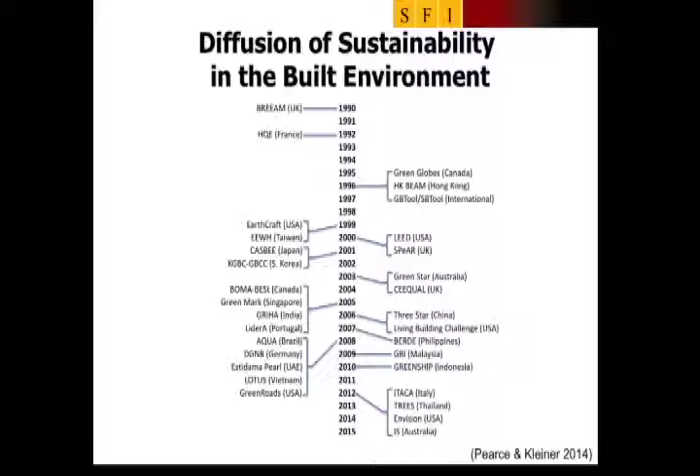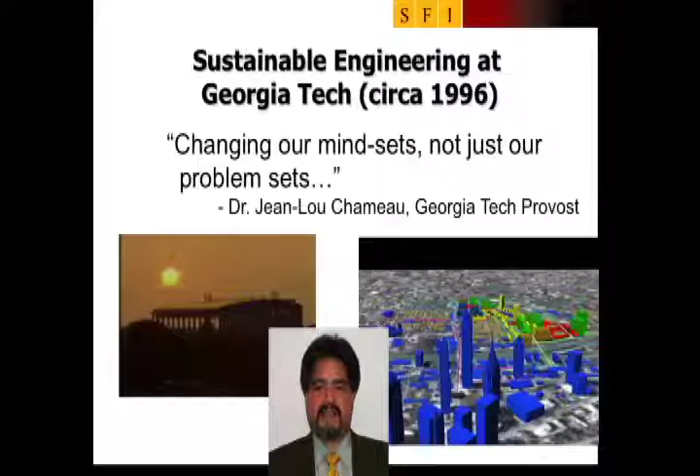And the provost at the time really captured it well, I think, when he said that sustainability is about changing our mindsets, not just our problem sets. It really requires approaching problems in a fundamentally different way than we have in the past.

So at Georgia Tech, we did a lot of interesting research, and I'm going to show you this figure and another one on the next slide that will probably make your head hurt, give you a headache. The point is not necessarily the figures, but the idea that we approached sustainability in the 90s just as we would any other kind of research topic.

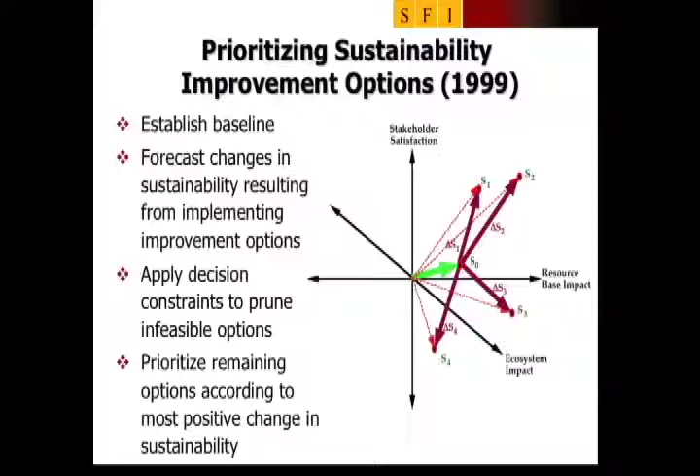So hold on to your hat. Here's the next figure. This one, again, took the idea a little bit further. And so at Georgia Tech in the 90s, we were looking at theoretical sustainability.

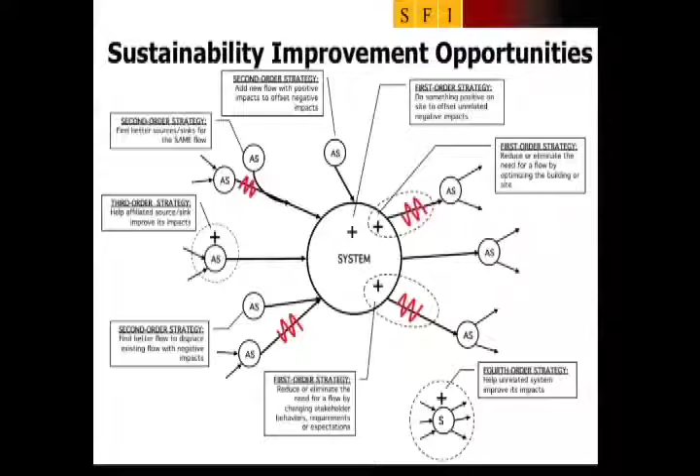And we had a lot of ideas about how practice should change and how you could apply cutting-edge research to achieving sustainability. So I finished my PhD in 1999 and went on to start focusing on taking sustainability ideas into practice.

Some of the research that we did at Georgia Tech was important, but it didn't exist outside the laboratory. And so I was fortunate to be able to participate as part of the development of a professional training series on sustainability.

So this was a little bit ahead of its time, but it was taught all around the US and also in other countries around the world. And interesting thing, but what it was really all about was taking research from the laboratory out to the real decision makers in the streets. And so starting in 2000, I spent a lot of my time in front of people like these,

talking about theoretical sustainability. And I showed them pictures like the slides I showed you a moment ago, great ideas from a theoretical standpoint, but not necessarily as easy to implement as these people would want.

And so I became aware, after working in this field for approaching 10 years, that sustainability really is less about technology and, in my opinion, more about people. And so, in fact, my experiences in teaching sustainability to practicing professionals has influenced the rest of my career since then.

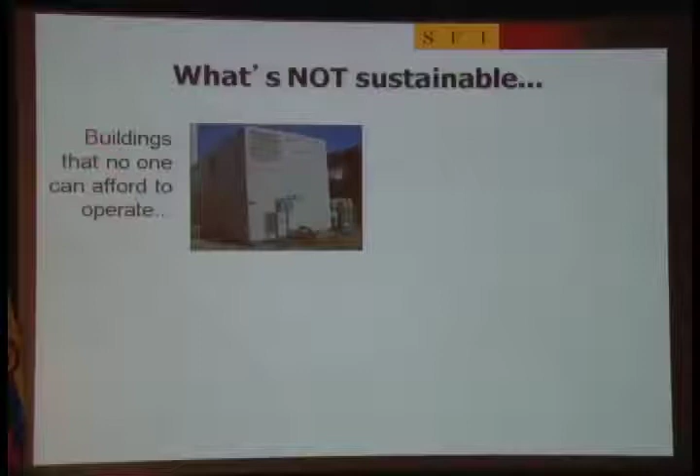What we learned over the long run is that buildings must be competitive with what alternatives people have in the marketplace. So if you want to make a building that's truly sustainable, you have to make one that people will actually want to use because they have options that they can choose from. It has to be competitive in the marketplace.

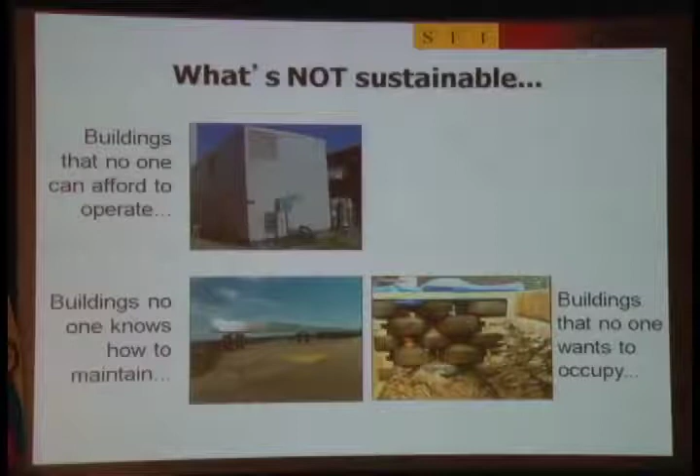Here's another example of a technology on a government installation in the US. This one, I don't know if you can see it very well. It's a passive solar hot water heating array, and it was installed at a national park visitor center in Colorado. That was its initial purpose. Again, now like the fuel cell, it's a sculpture. It basically sits there. It was decommissioned after 1 year of use and replaced with a more conventional electric resistance water heating system that was more familiar to the people responsible for maintaining the building. So this is an example of a technology that was a poor fit for the context in which it was implemented.

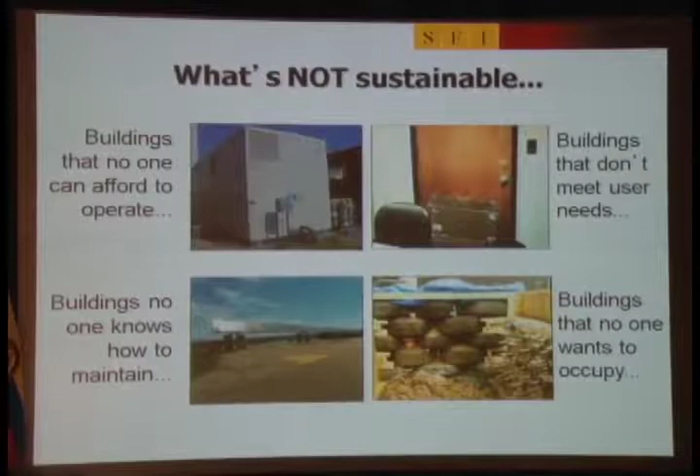So in constructing sustainable buildings, we have to be aware not only of the economic context in which our buildings will operate, of the market competition we have for people choosing where to locate, but also of the ongoing responsibility our buildings will require. And lastly, we have to anticipate what our user needs are going to be. Otherwise, we end up with a building that may be more environmentally friendly, but is ultimately not used to its capacity, and therefore not a good use of resources.

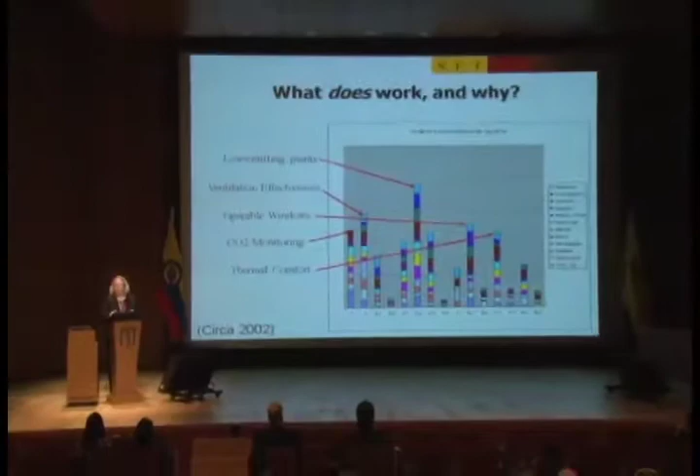So if I took the same poll in a private sector organization, in a house—we heard earlier about sustainable home construction—would I get a different answer? I probably would. So my point with this graph is that you have to be aware of context in understanding what technologies are most likely to work.

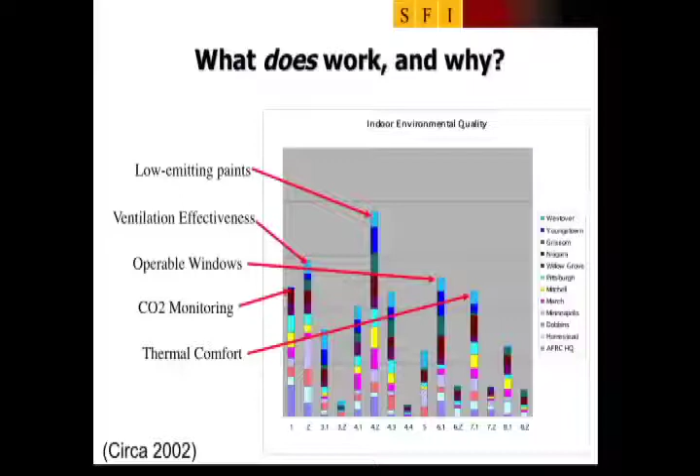In thinking about people who adopt sustainability, it's important to understand that we have different characteristics as decision makers, as well as different priorities. So we all know somebody, maybe it's you, maybe it's a friend or family member, who has to be the first person to have the next new technology.

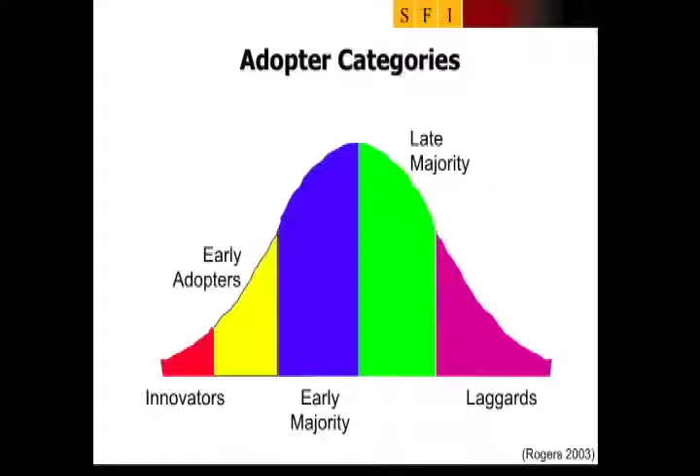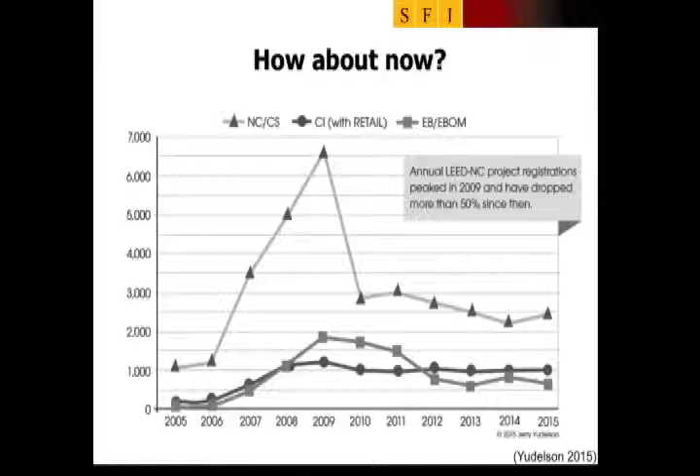One thing that's interesting to note is that often we see what's called Moore's chasm in the advance of technologies. This is a theory that looks at why good ideas sometimes stall and fail to take off. We have seen green building advance in the U.S. marketplace, but we are not yet to a point where the majority of buildings are certified. So this shape we saw back here has not necessarily reached that peak yet. Something else is happening. So what is that?

Moore's chasm is one way to understand what's going on. This theory was developed as a response to the dot-com industry, the computing industry, in which we had tremendous market investment in innovations. Companies would develop an innovation, attempt to go public with that innovation, and convert their company to a publicly owned company. We would see tremendous investment in ideas, and then not long after that, the companies would all of a sudden start not to do so well. So we became curious whether this was something we could observe in the green industry as well.

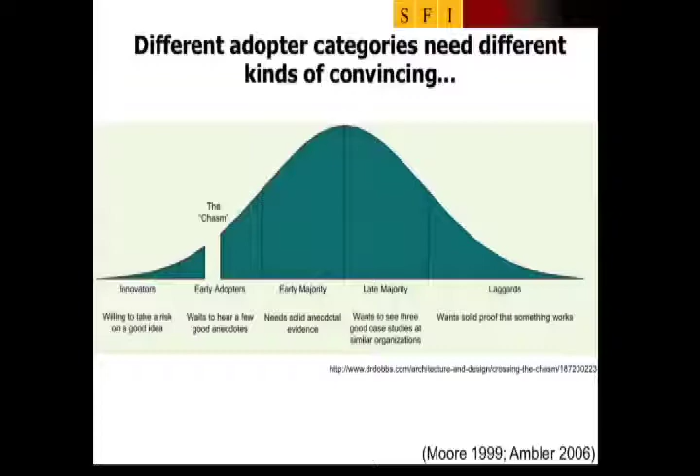One of the ways we understand this is by studying a concept called routinization. So we started to study routinization. Routinization is the idea that you will try a technology, and if it has a good outcome, you will continue to use that technology in subsequent projects. We know this is how design is often done, and how construction often happens. So we wanted to understand what factors caused some technologies to be routinized and others not.

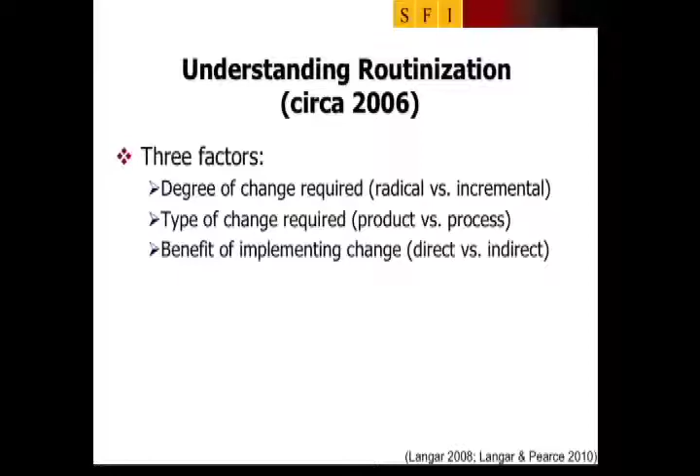We looked at three different factors, and I'm going to show you a little bit about what we found with these. The first factor is how radical the change is. I'm going to ask you to imagine which of these you might be more likely to decide to try: the radical innovation or the incremental innovation.

Radical innovations, on the other hand, require changes in complementary systems. They may require introduction of completely new systems. And often they require the people who implement, the contractors, to behave in ways they're not used to behaving.

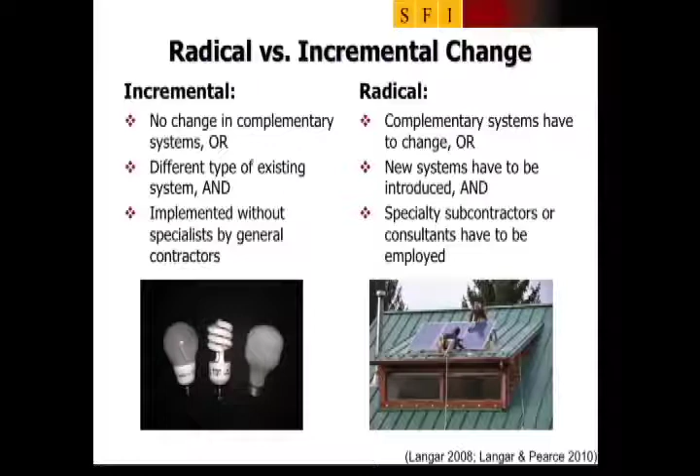So think about it. Which one do you think is more likely to be routinized? That is, used again and again and again.

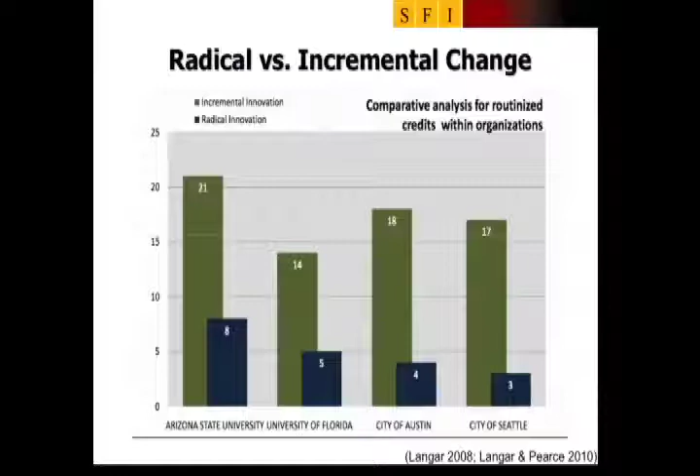So let's look at the next category. The next idea that we looked at was product versus process change. If you want to innovate for a product innovation, basically you may be able to just purchase that technology without requiring any changes in your operational conditions following adoption.

An example here is OLED lighting. This doesn't require any new kinds of actions on the part of people maintaining the project. In fact, it requires less, because the life of this technology is longer.

A process change, on the other hand, requires changes to owner behavior or expectations, and it requires different operating conditions than people are used to.

I included here an example of what once was a green wall, a vegetative wall, that was part of a space. This was from a corporate facility in South Korea where the building was built as an experimental building, and subsequently the company that developed it moved people out of the office and shut the building down temporarily.

Most systems we use in our buildings can survive okay. They can survive just fine when you leave and lock the doors. Not so your vegetated technologies like living walls. So that's an example of a technology that required a change in the operational procedures of that company and failed when it did not achieve that change.

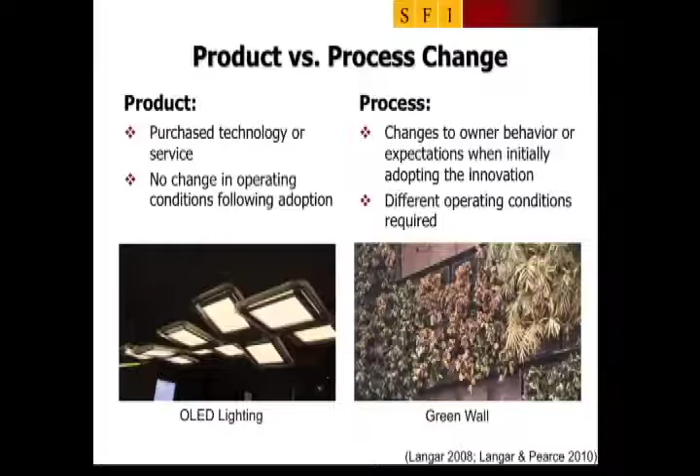Maybe you're not surprised to see that product changes were the most frequently routinized. It's a lot easier for organizations to make changes where they can swap things in and out, again, without having to change their behavior. All right, last but not least, we looked at direct versus indirect economic benefits in what owner organizations decided to implement.

Direct benefits come from technologies where there is a positive cash flow or measurable savings that accrue to the owner, the person who chooses to implement these technologies. So in order for an innovation to be rated as having direct benefits, it had to have some measurable, likely economic benefit to the owner.

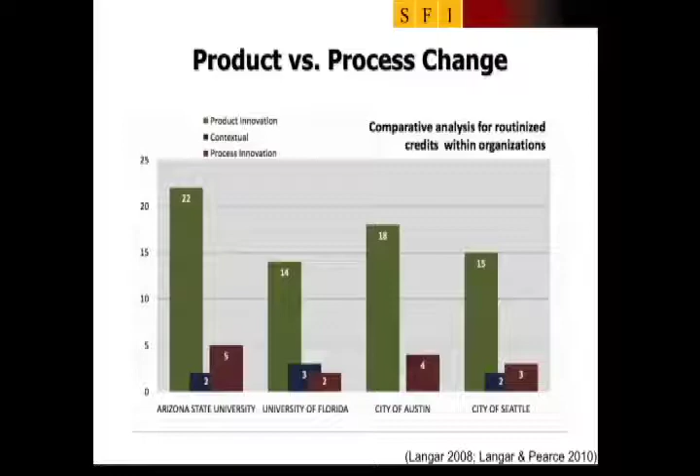The example here is low VOC paint. You saw earlier that that was one of the most popular green technologies we found to be adopted in government organizations. This offers direct economic benefits to owners because not only is it roughly equivalent in price to conventional paint, but it allows activities to resume more quickly in occupied spaces. So you have less downtime, which means that your productivity can resume more quickly. That's a product with a direct economic benefit.

Indirect benefits, on the other hand, might offer some kind of cash flow or savings in very specific contexts, but not all the time. They may also offer benefits to society at large. So the example I have here is floor tile with recycled content made from windshield glass.

This is a technology that was implemented in my office building at Virginia Tech. This is a product that was much more expensive than conventional porcelain tile you would use in an application like this one. It had a much higher initial cost and offered no savings over the product it displaced. It has environmental benefits because it uses a waste stream. It also has public relations benefits if you understand the environmental benefits it offers, but no direct payback to the owner. So which of these do you think is more important?

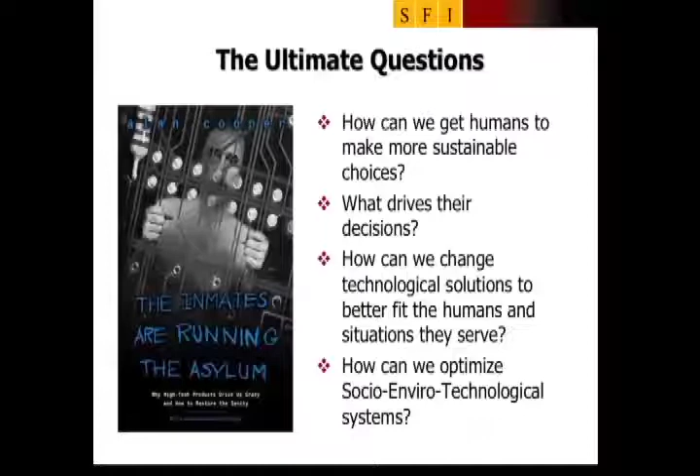To do this, we have to understand the approach we take now to designing. I'll speak from the standpoint of an engineer - I can't necessarily capture the thinking architects do, but from an engineering standpoint, we know how to design. We calculate when failure will occur, and we design to avoid that failure. Nevertheless, we still have situations like this, where bridges collapse - not because they weren't designed well, but because we made mistakes when we anticipated how they would be maintained, what loads they would be expected to hold.

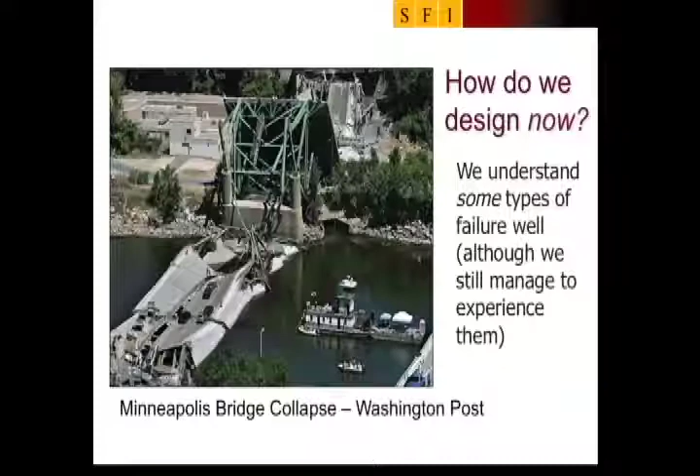So how do we apply these lessons to sustainable technologies? We need to better understand new kinds of failures. I'm going to show you some examples of these very specific kinds of failures that we are seeing in sustainable technologies.

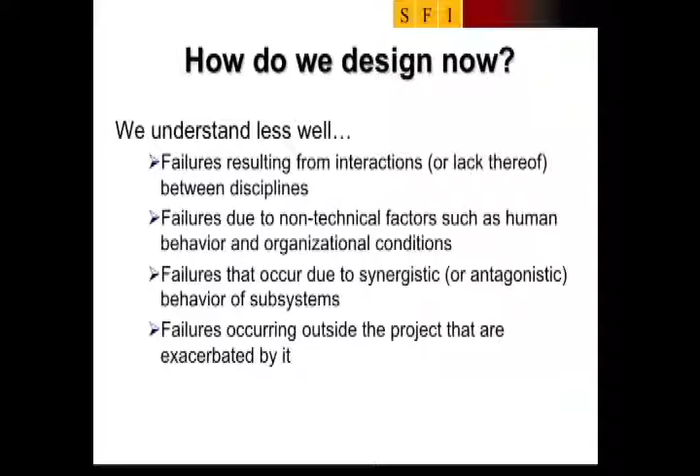Here is an example of a sustainable, green technology cluster where the technologies are complementary, where each has benefits by virtue of being used with the others together. What we have here is a standing seam commercial metal roof. On top of the metal roof, we have laminated photovoltaics - not necessarily the most efficient system, but power production taking place on a roof surface. Beneath the roof surface, we have a hot water preheating system where heat absorbed by the roof is used to preheat water required for use in the building.

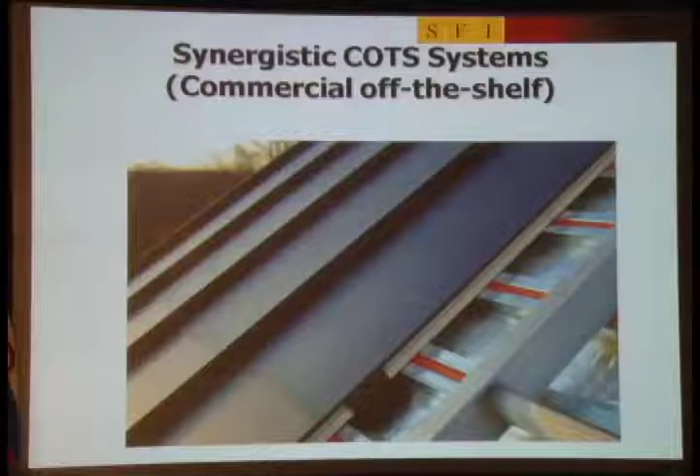How is this synergistic? Well, first of all, we have three technologies being used in the same space, which is quite handy when you're trying to design a facility. But also, we have a synergy that results from the heat transfer from the photovoltaic surface to the water - the water actually acts as a cooling mechanism for the photovoltaic panels. Photovoltaic panels have an optimal production at a specific temperature; if they get hotter than that temperature, their efficiency drops off. So by putting a mechanism to help cool the panels beneath those panels, we're able to transfer the heat away from the photovoltaics and into the water where it can do something useful.

So this is a synergistic example. It combines energy production, effective roofing and a building envelope, and hot water production. This is the kind of synergy we want to achieve.

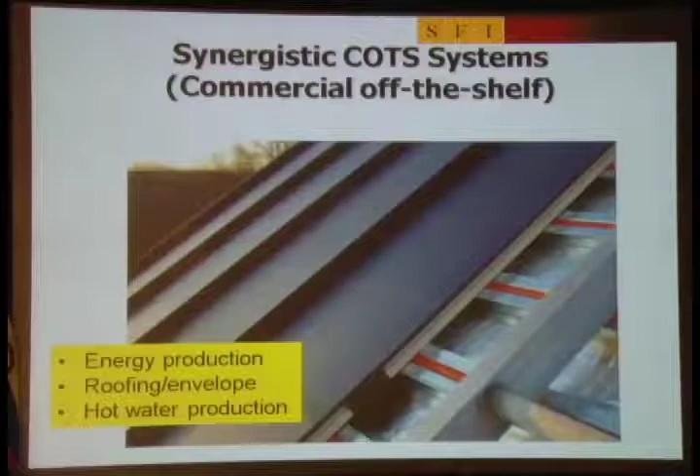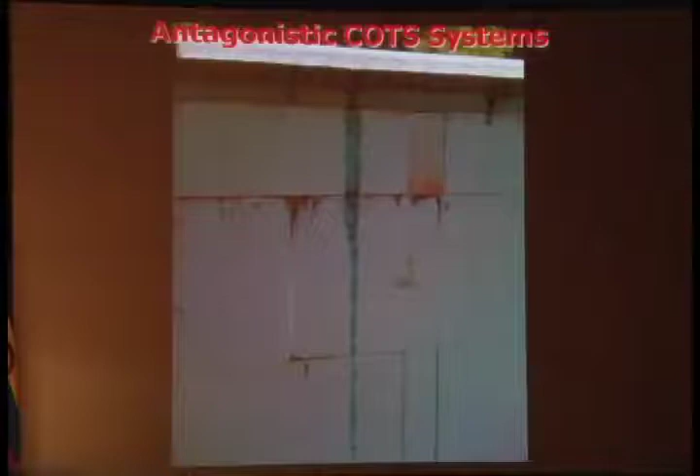Here's an example of an interaction that we do not want to happen. This is an innovative kind of concrete form used in the United States, made from extruded polystyrene - giant blocks 8 feet long that you snap together, creating a continuous thermal envelope on the inside and outside of your concrete wall. What you see here is the foam exterior; behind it is a 6-inch reinforced concrete wall, and then on the other side is an additional layer of foam - really important when you're trying to achieve a high-performance building envelope.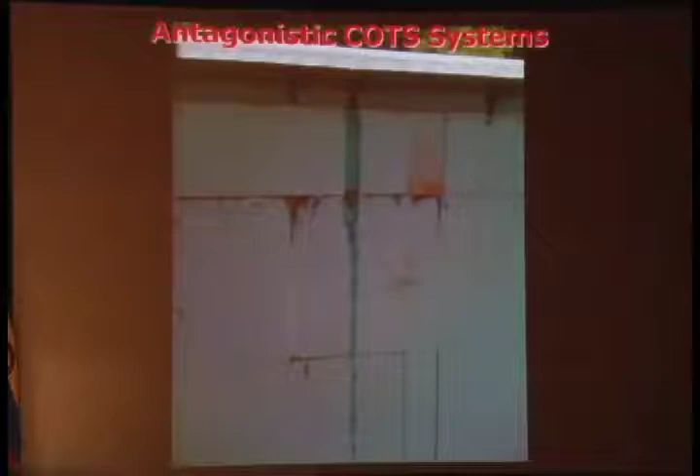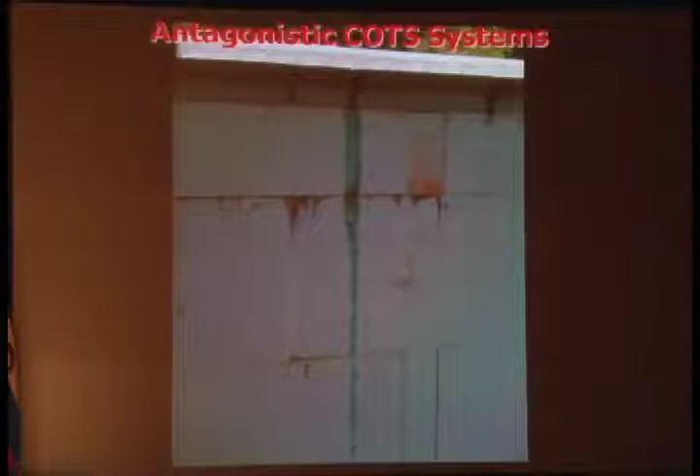What you see here is an example of a chemical reaction between the sealant used on the top slab surface and the polystyrene forms. This was completely unanticipated in the design of this structure, that chemical interaction. It actually caused a significant thermal bridge right here, because almost all of the concrete form was eroded away.

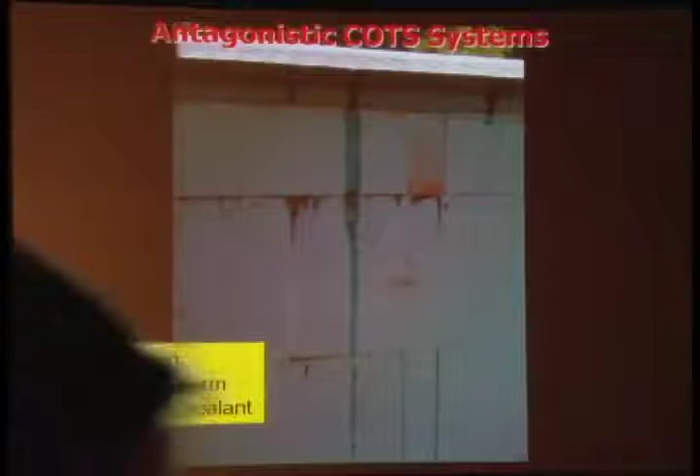So this is an example of interactions, again, between building systems for insulation, concrete forms, and concrete sealants that was unanticipated. What could possibly go wrong? Well, there are plenty of things that could.

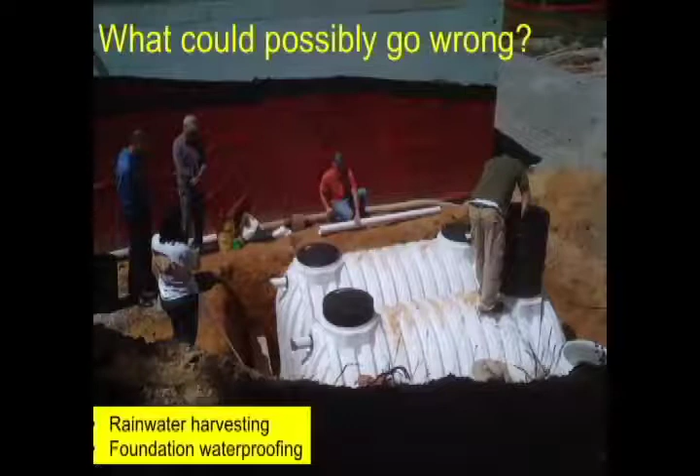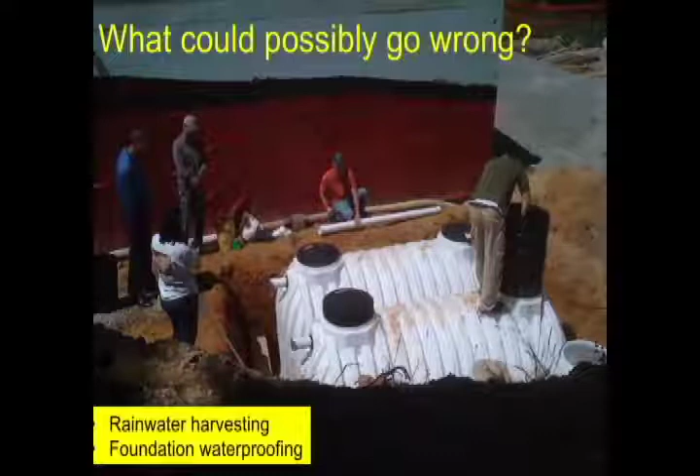This is an example actually from my house in Virginia. I have an underground rainwater storage system, and I provide all the water for this residence by collecting and harvesting rainwater from the roof. So this is an example of the tanks being installed. Here we have rainwater harvesting, and in the background you can see foundation waterproofing, and the insulating concrete form system covered by that.

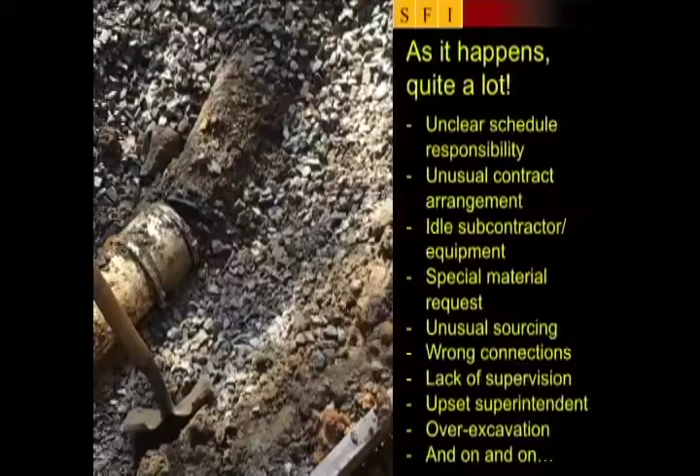So what could go wrong? Well, this is a very personal example of many, many things that could go wrong that are not necessarily as clear as a bad chemical reaction. So this is a case study. I won't go into a lot of detail, but I will assure you that not only do sometimes our innovative technologies interact badly for technical reasons, they also can act poorly together because of management reasons, because of people reasons.

In this project, the tanks were installed under an unusual contract arrangement with unclear schedule responsibility. They were installed on a day when a subcontractor was present with equipment on site, but not active, and that equipment was mobilized before the tanks arrived on site. The excavation subcontractor dug the holes too deep. The tank subcontractor decided to use the hole as it was, buried the tanks too deep, and left the site after they were installed but before it was backfilled.

What happened during backfill is that the supply connection to the tanks was ruptured during the backfill process, and nobody knew. All we knew is that the water quality from this system was extremely poor. You can imagine why that might be happening if you look at the breach in the collection piping here.

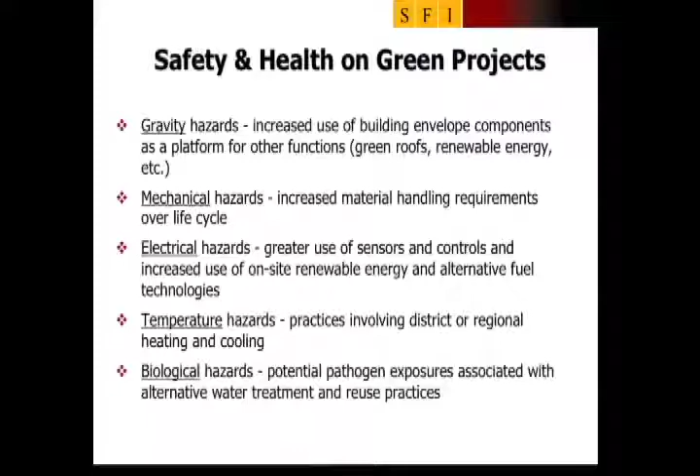So I'll show you some examples of these, starting with gravity hazards. I alluded to this a few slides ago. All of a sudden, by making greater use of the building roof and the building envelope as a platform for doing new things, for providing new functions, we introduce both construction workers and operations and maintenance workers to working at height. And this may not be something that these trades are accustomed to doing.

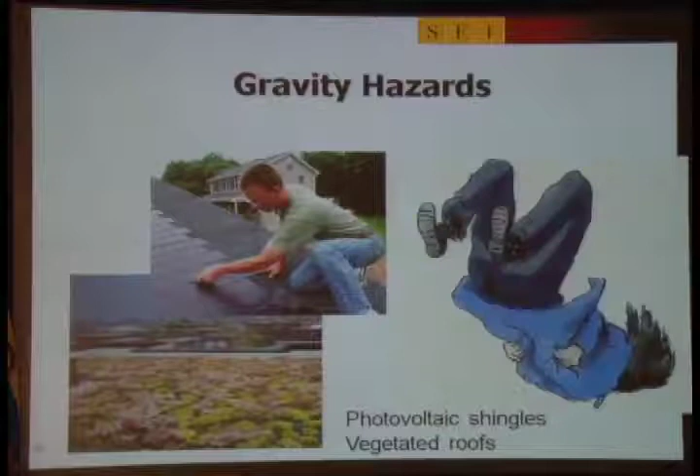So we now have people who may not be trained. This guy working on a roof has absolutely no fall protection at all, but he's up here installing a photovoltaic integrated roof system. Likewise, vegetated roofs - all wonderful technologies from a design standpoint, but from a construction standpoint, they pose hazards that we as construction managers and designers of construction operations now have to manage and make sure are safe.

So by their very nature, green buildings involve doing things on the building envelope that we haven't historically done. The building envelope is now used for more than just enclosure. Now it's a platform for energy production. It may have more glass because it's a platform for lighting.

It may hold a stormwater treatment system in the form of a vegetated roof. But all of these things pose new kinds of risks.

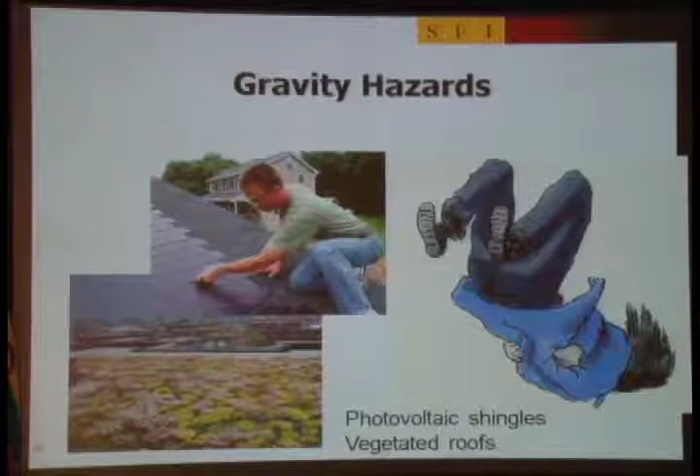Mechanical hazards: we expect on our green projects that there will be greater amounts of handling of materials. Not only do we expect additional handling from things like deconstruction, but also things like on-site sorting of recycled materials. All of these things require increased contact with potentially hazardous kinds of materials and systems.

Even if we employ mechanical lifting, now we're introducing new kinds of hazards that may involve risk of crushing or struck-by risks. So we have to be aware of these things as we decide what technologies we want to implement.

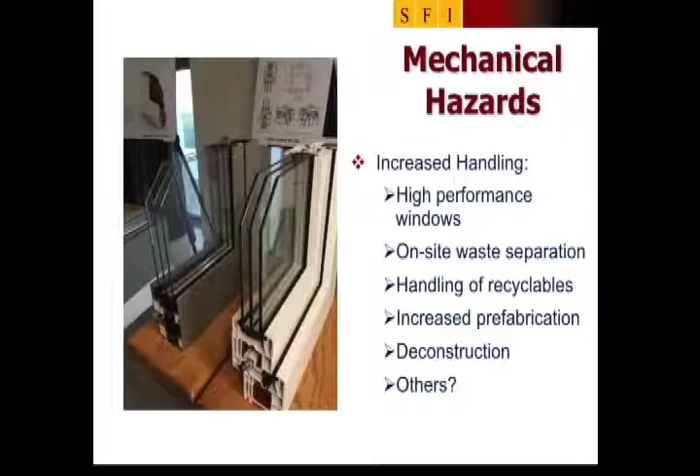Biological hazards are especially interesting. I'm working with a group at Virginia Tech that is studying potable water systems inside buildings, and we're finding some unanticipated problems with these. One of them has to do with water heating systems.

In the US, for example, people are encouraged to reduce the temperature of their water heating system to save energy. What they don't realize is that that creates an ideal temperature for bacteria to breed, including Legionella and other kinds of opportunistic pathogens that can cause problems. So that is an example of a tactic designed to save energy that actually causes a completely new kind of problem that has to be handled.

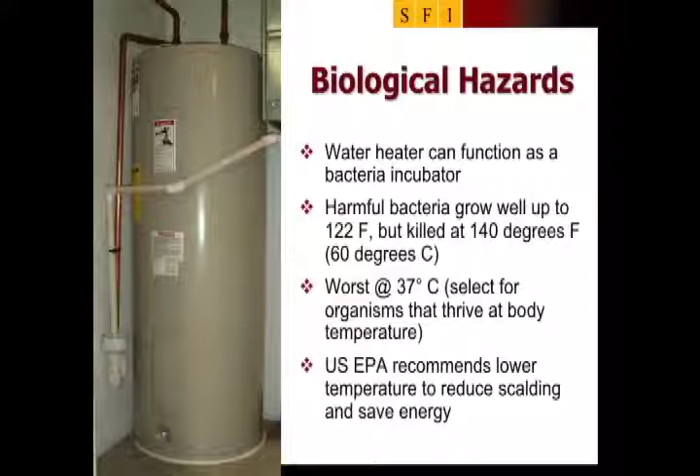Then we have electrical and temperature hazards. We're incorporating more and more power production systems on our buildings. But what you may not realize is that photovoltaic panels generate a charge every moment that they're exposed to light.

So one of the things that has been identified in the US as a hazard for firefighters is that even though you may disconnect your panels when you arrive at a building to address a fire, you can disconnect the panels from the rest of the electrical system, but those panels continue to be live and continue to produce electricity that can harm you, even though they are disconnected. And so we're seeing new ways of fighting fires on green buildings.

For example, firefighters might bring a cover and actually cover the surface of photovoltaics to stop that charge production. Completely unanticipated, not what you're thinking about when you install power production on your building. But it poses a real risk, a life-threatening risk to people who have to maintain the building and handle problems.

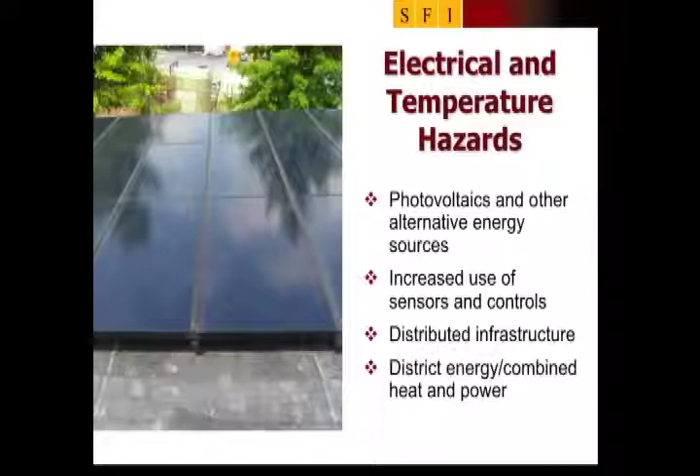And we see the use of this system a lot in areas of the United States where water is very scarce. What we are also seeing in those areas is increased levels of corrosion in the piping due to water constantly cycling through. We see increased temperature mixing in the storage tanks, which lead to possible bacterial issues.

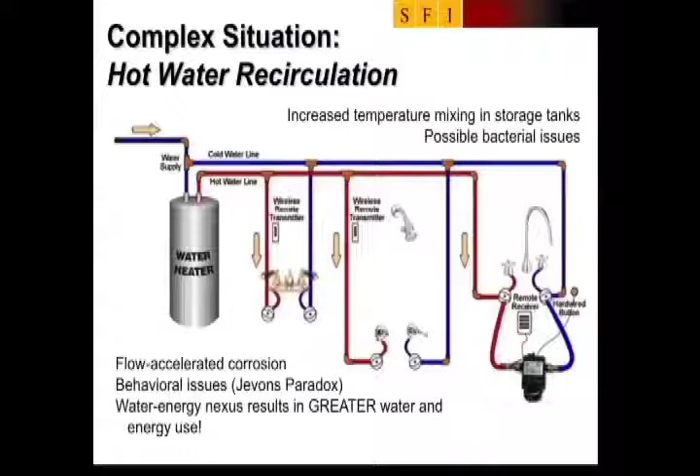We see behavioral issues where people may be less likely to worry about saving energy because they believe that this technology is doing it for them. And so here again, the combination of strategies, all of which have good objectives, can cause increased problems that we don't think about. And here again is my favorite example of water heating.

This is a technology that worked perfectly well when it was installed, but because it did not fit the operational practices of its users, it was abandoned in place.

So ultimately, I'm interested in creating sustainable, resilient, human-centered communities. And that involves understanding how sustainable technologies work together and what kinds of impacts they have that we may not anticipate when we combine them on the drawing board.

Some of the drivers for these things in the US: increased net zero policies, more ambitious design goals. There are also problems with existing infrastructure that are apparent. And we also know that with climate change, there will be increasing stresses put on our infrastructure systems.

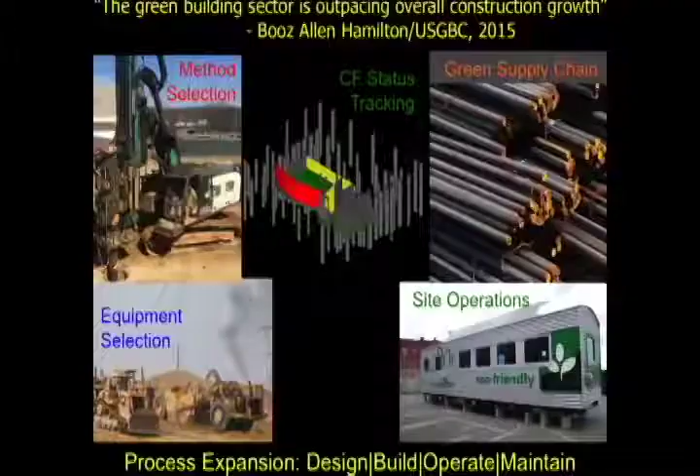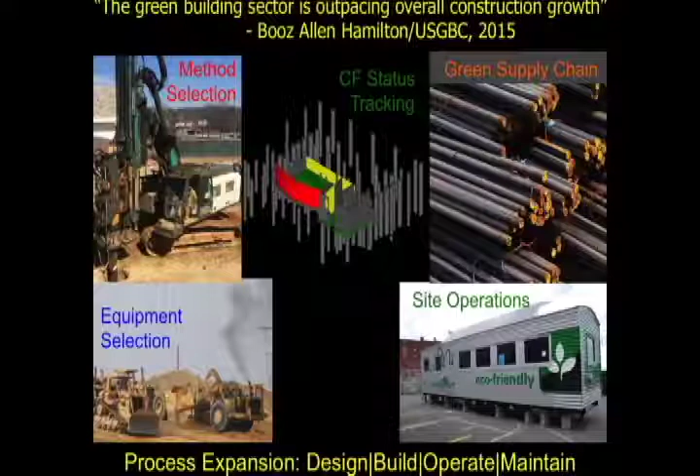We know overall that now in 2015, 2016, the green building sector is outpacing construction growth. We finally achieved the peak of that curve in terms of adoption. And we see new technologies being implemented on the construction site.

But until we are able to construct buildings that take care of themselves, like this, we are still creating problems. We may be increasing our efficiency. Is that enough? Not necessarily.

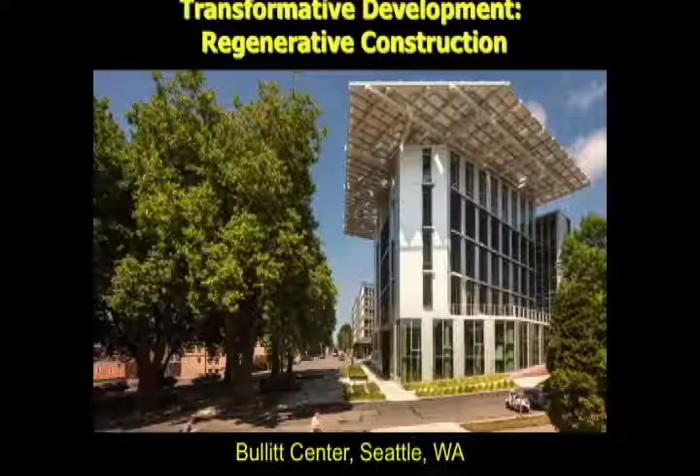So this is an example of the Bullitt Center in Seattle, Washington, that was designed to behave like this, to be living, to provide its own water by collecting it from the environment, to treat its own wastewater, to provide all the power that it needs to operate by harvesting it from the sun. So we're starting to fundamentally think differently, fundamentally change our mindsets, not just our technologies.

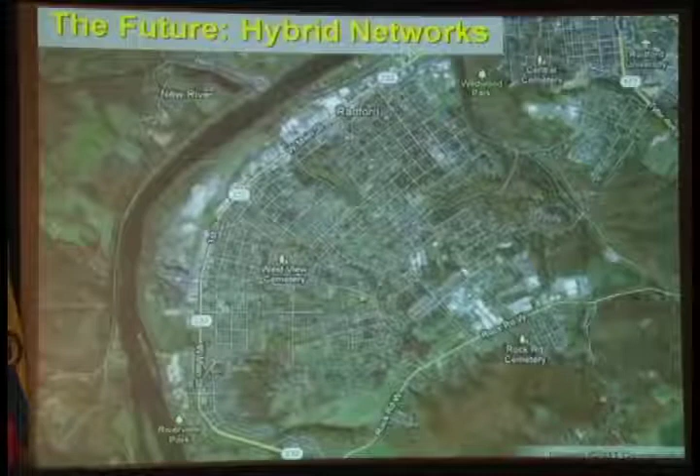Where do I see us going in the future? One of the things I study now is overall infrastructure networks and how they operate currently and how they might operate in the future. So in understanding the resilience of a human settlement, for example, you might want to design infrastructure that can take advantage of physical characteristics. And obviously this is something we do now when designing our systems, but how can we design infrastructure such that it can operate passively whenever power is cut, for example?

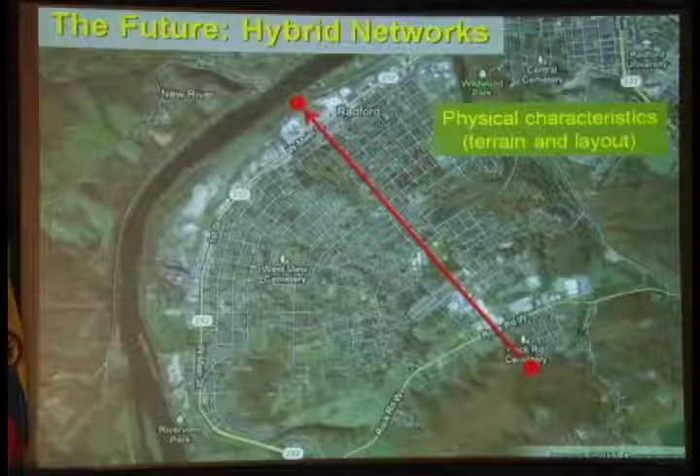We also want to consider economic characteristics of our markets and look at what happens when privately owned buildings invest in systems that reduce their dependence on centralized infrastructure. How can we plan for the centralized water supply, power production, wastewater treatment? How can we plan those systems while at the same time encouraging private owners to produce their own power, to harvest their own water, to treat their own wastewater? And what should be the balance between those?

If you are a government agency that wants to maximize the resilience of a community for which you're responsible, how much should you spend on centralized infrastructure versus incentives and policies to promote distributed infrastructure?

Ecological characteristics are also important. For example, in considering a sustainable city, how much of the existing land area should you preserve as a natural ecosystem? And where should you position those in your overall land use to maximize your ability to handle storm events?

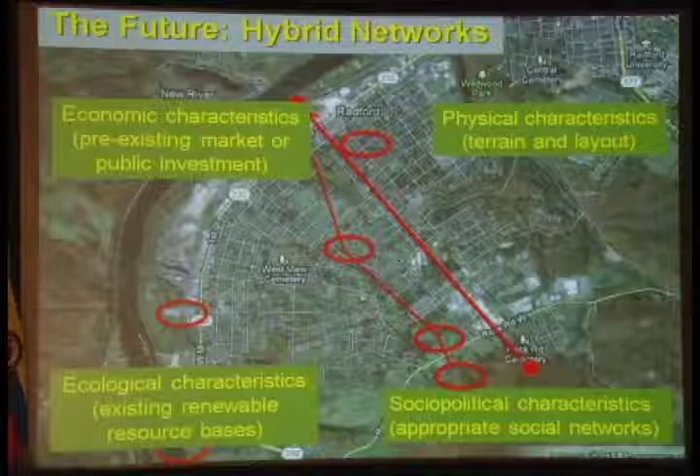And lastly, socio-political considerations are also important. When you implement systems that are different from how we have always done things, what changes do we need to make in our organizations to better be able to handle those innovations? How do we need to train people to properly operate them? How do we monitor their behavior? All of these are questions that remain to be answered.

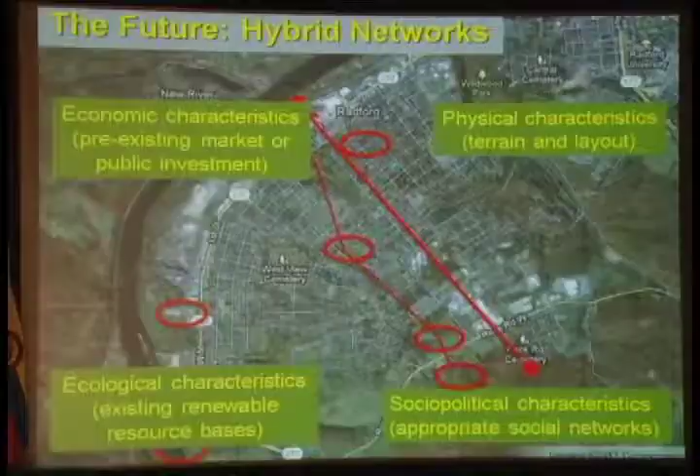So these are some of the key research questions that my team at Virginia Tech is presently studying. I don't know the answers to them, but I believe they're important as we look forward to sustainable communities in the future. I think we need to better understand not only how complex systems behave, but how we as designers, builders, and managers of those systems influence their behavior over time? How can we predict their performance? And how can we use policy to optimize the behavior of the system overall?

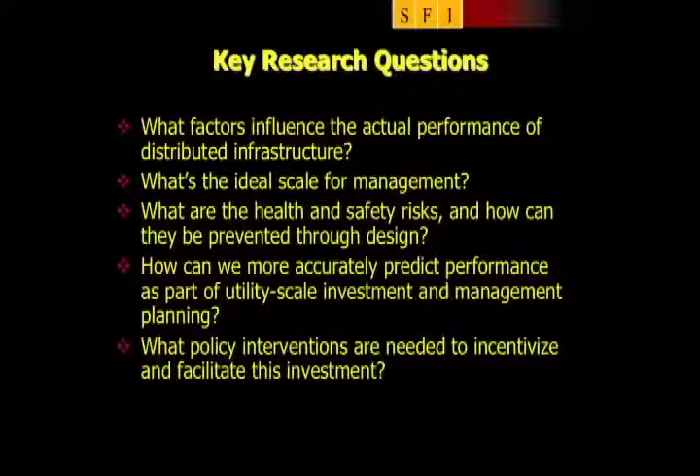So what should you conclude from this? If you are a practitioner, maybe you're encouraged, maybe you're discouraged. In my opinion, it's all about finding leverage points. And that's why I spent time today talking about some of the important leverage points that influence people's choices when they are deciding what technologies to adopt and what technologies to routinize. You have to understand the context in which you will apply an innovation before you can expect that innovation to succeed. So it's all about finding those leverage points where a little bit of effort can make a big difference.

Sustainability isn't necessarily as easy as it looks. We continue to find new ways in which things can go wrong. But ultimately, if we learn from our mistakes, we can create better buildings, parts of better communities that will enable us to be sustainable in the long run. And with that, I thank you for your attention.